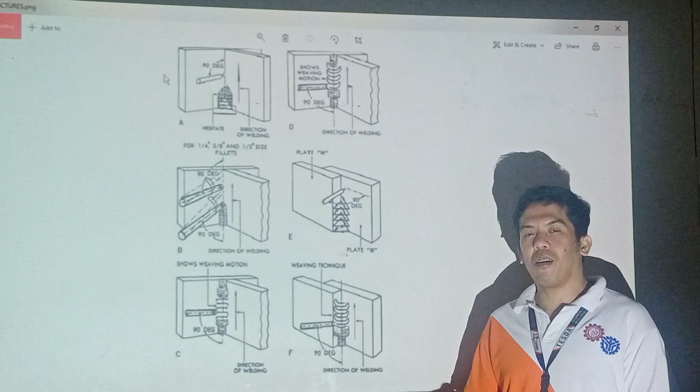So, what we'll take out now is one of our learning outcomes regarding our core competency. So, welcome to our core competency.

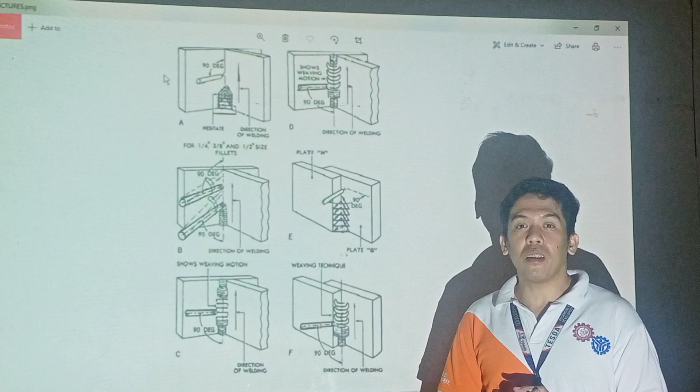This is welding carbon steel plates using SMAW in 3F position, or commonly known as vertical position. But this is fillet welding, so fillet welding is different from groove welding. Fillet welding has no groove. You just weld it on top of the joint.

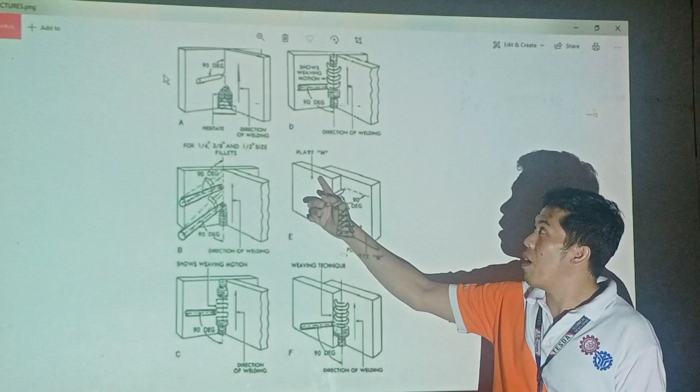Based on our diagram, we can see the different types of welds. The first one is T-joint. Actually, this shows T-joint and lap joint. So this is lap joint.

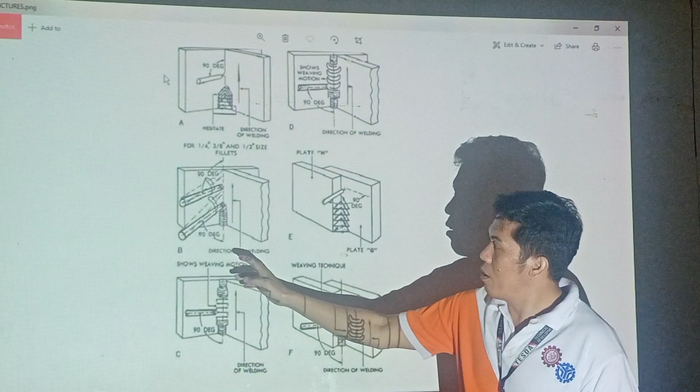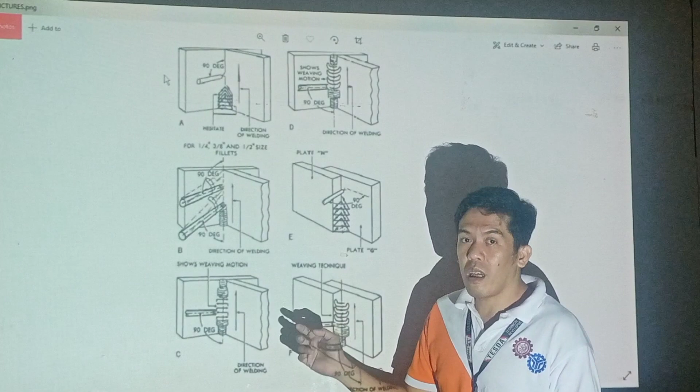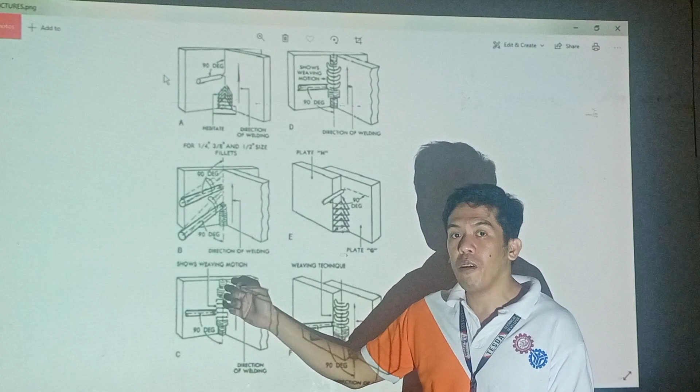It shows how we do it - starting from the bottom, we weld upward, following the diagram. That's why it's called 3F, commonly known as vertical position fillet welding. It's called fillet welding because it has no groove, unlike the other position which we call 3G, which is groove welding. G stands for groove, and F stands for fillet. So this time we are doing fillet welding under the vertical position, which is 3F.

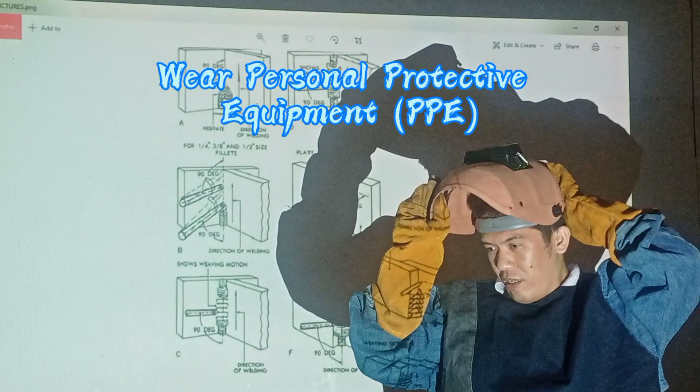So guys, now that we have our PPE on, let's go now to the practical work area. Let's go, guys.

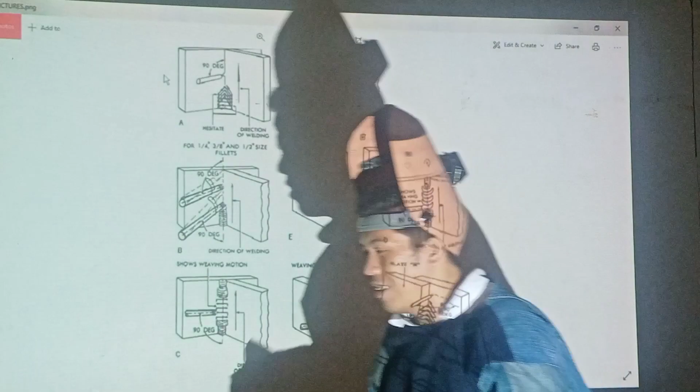Welcome to our practical work area. This is what we'll weld - this T-joint in 3F position. Let me repeat why it's called 3F position - the 3 signifies vertical position. When we say 2, that's horizontal position; when we say 1, that's flat position.

This time we'll do 3F fillet welding. F stands for fillet, which is fillet welding - it has no groove, we weld it directly. That's why it's called fillet welding. So now what we'll do, to repeat, is the 3F position.

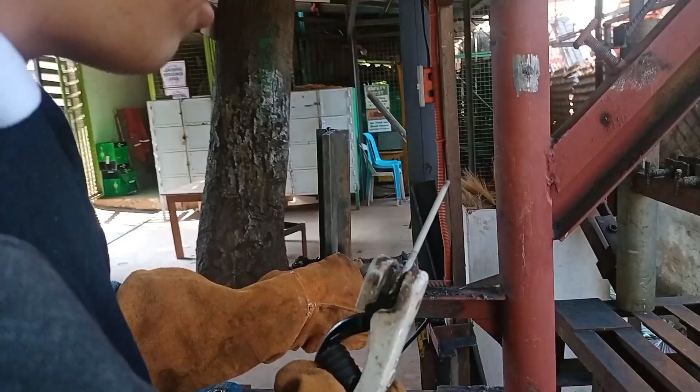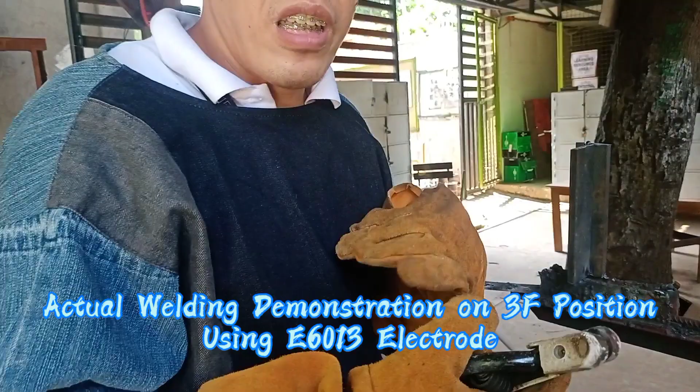I'll start welding here, welding it upward until it's filled. Now, get ready, I'll start welding for our 3F position. As a reminder, the electrode used for fillet welding is 60-13 or 70-18. Okay, let's start.

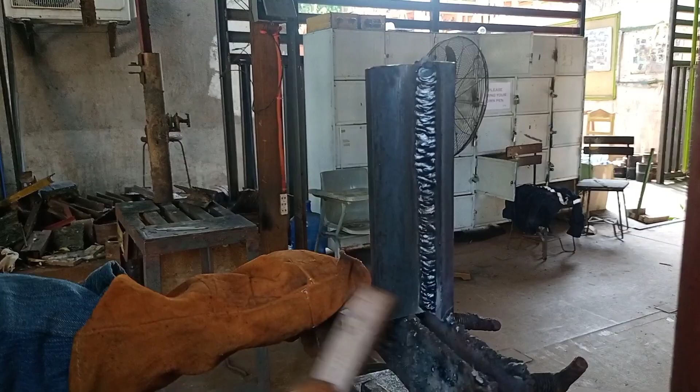Okay guys, so this is the final output of our weld carbon steel plates using SMAW in 3F, or fillet welding vertical position. I hope you learned something about how to do our fillet welding in vertical position.